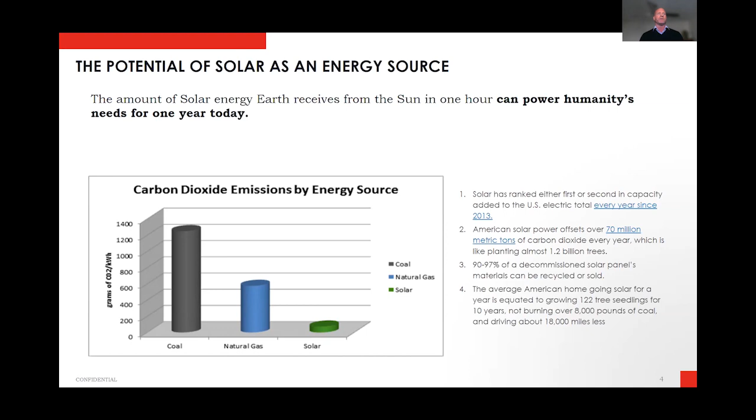You see natural gas there in the blue that's coming up, and then solar. But the idea with solar is it has ranked either first or second in capacity added to the U.S. electrical grid every year since 2013. So again, kind of late to the game, as Diana was saying, the last 10 years. But you can see we're really coming up and trying to make some headway against the cost stack of carbon dioxide emissions.

Let's talk through the next slide here, which I think we'll see the countries with the highest PV penetration. I think there's where Australia comes in. You've got Spain. We saw that come up in the answers. Greece, Honduras, Netherlands, Chile. There's Germany. When I was answering that question myself, I thought Germany was up there. But good to see them.

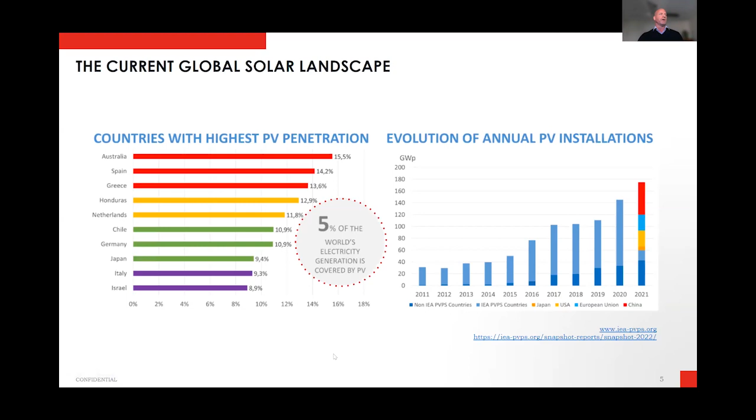Japan, Italy, and Israel. I think the evolution of annual PV installations is pretty apparent here from 2011 all the way to 2021, and you can kind of see that slide. And look at the European Union, and the US is still kind of relatively small in comparison to the global solar landscape, but again, growing.

I think the labor cost has been flat over the past 5 years. Now we've got some PV power increases and some efficiencies in installations and things kind of creeping up, but again, we've got some increased labor rates over the last few years, so that kind of is a wash.

But I think the biggest challenge for solar in the US and the adoption is the customer acquisition cost. That's always been kind of a struggle, and Diana and I being in the residential solar space for a couple of the larger providers in the US, that cost stack can be about 25 to 40% to find the customer through those lead generation activities. And if that pushes down on the margin, it's a challenge for most of these solar companies out there to make money.

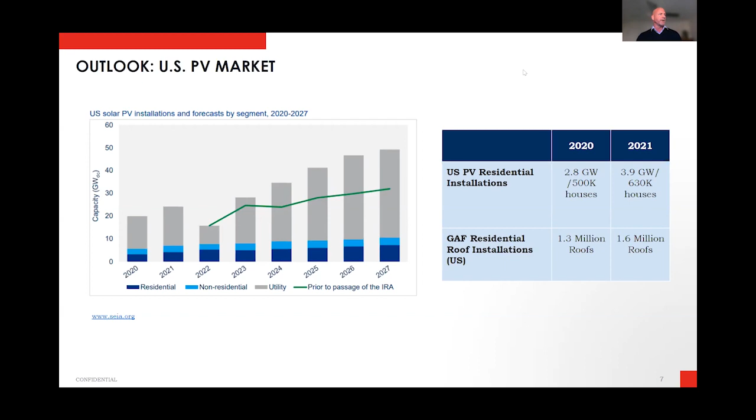What's really pushing our change is the consumer demand. More and more property owners want solar. You guys can probably appreciate that. Talking to the roofing populations, in some parts of the country, 1 in 5 customers is asking about solar at a re-roof. Hey, what about solar? Do you have a partnership? There's no clear-cut answer, but this generation of home buyers is looking for the smart home. They're looking for advancements in technology to include energy efficiencies, and that's obviously why we're all on this call.

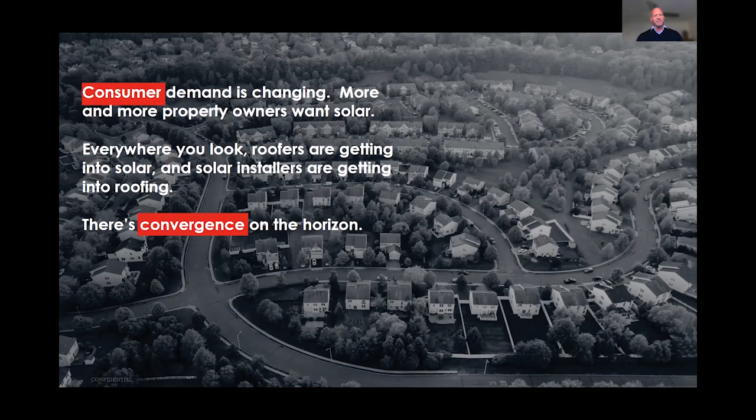But photovoltaics and solar really is out in front in terms of a value add, in a lot of the areas that we really before have never thought of as solar areas. This is definitely a national convergence on the horizon: solar installers are getting into roofing, roofing is getting into solar, and so you see this convergence happening.

Let's talk a little bit about where we've been. I think this is an important kind of background and level set here. Again, coming from traditional bolt-on solar, with these next few slides I in no way am trying to take away from traditional solar progress with rack mount. We came from rack mount. I still think there's a value add there, but I do think there's a fundamental design flaw in the attachment of the racking, the mounting of solar.

And I think that's what drove me to look for the additional product scope that this provides as kind of a built-in, where we're not penetrating 160 holes into a roof, voiding all the warranties of the roof, and having waterproofing issues for years to come.

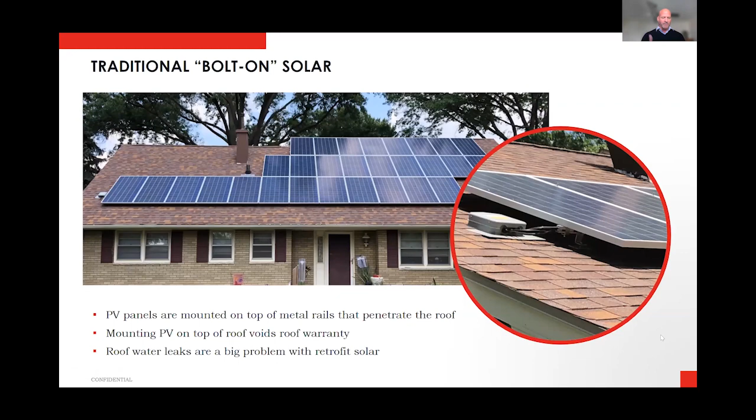And I think I've seen dozens of photos over my 12 years in the business where we've penetrated these 160 holes, hopefully the pilot hole goes in, and then we miss the rafters. Water finds the hole. It always does, drips onto the sheetrock. And I've seen numerous times where the sheetrock in the living room has failed and the whole thing has come undone because of one errant pilot hole.

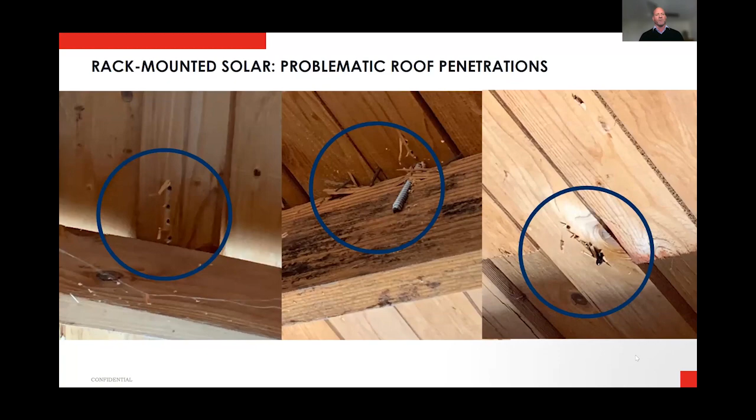And in the industry of rack mount, a lot of the manufacturers and solar installers, I've seen anywhere from as low as a 5-year penetration roof warranty to a 10-year. That's about standard. So what happens to the consumer from years 10 to 20 or 25 of the economic life of that solar? They're really exposed; they've voided the warranty on their entire roof.

So with a solar manufacturer, we're at the mercy of them covering that hole. Number 2 is, will they be in business? Because they are fairly new. And number 3 is, who's taking care of that if the solar company is out of business? And so I think that's inherently the rack-mounted issue that we keep talking about.

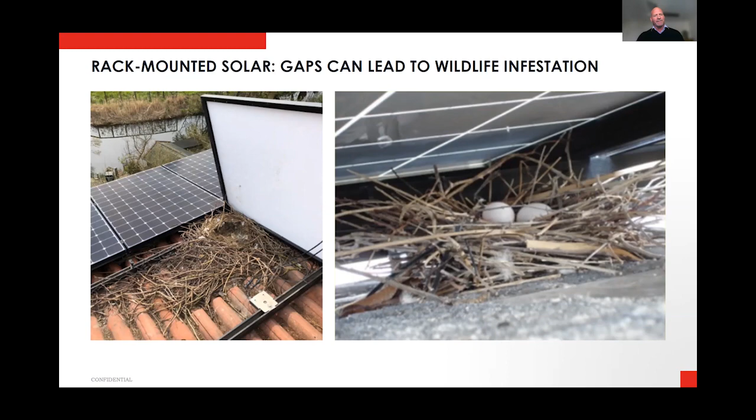Again, you have the infestation that's common in some parts of the country, which really does not do well for breaking down the materials. And then, most notably, wiring under the panels. You've got this exposed wiring, if you will. It just creates hazards. I've seen chewed wires and all kinds of historical issues with that. So again, not taking away from rack-mounted solar, but there's got to be a better way. And I think that's what Diana's going to go through in just a second in our new products. So Diana?

Scott, have you ever heard that PV can actually protect the roof as well, because it keeps the sun and the rain, the things that degrade the roof, off of it? Is there any benefit there? Have you heard of that at all?

Absolutely. If you think about the clearance, some of the clearance can be a bad thing and a good thing. The clearance that is a bad thing, we just discussed. The clearance that's a good thing is it creates an airflow in there, which naturally creates this shading mechanism for the existing shingle or tile and the underlayment. So there's benefit as well for the rack mount, where it will extend the life under the PV.

The problem is then you're looking at the elements that are exposed. So once the degradation of your roof happens, you're replacing the entire roof plane and not just the area underneath. So if the whole entire plane was covered, I think you would have an argument that that may extend the life of a traditional warranty or a shingled roof.

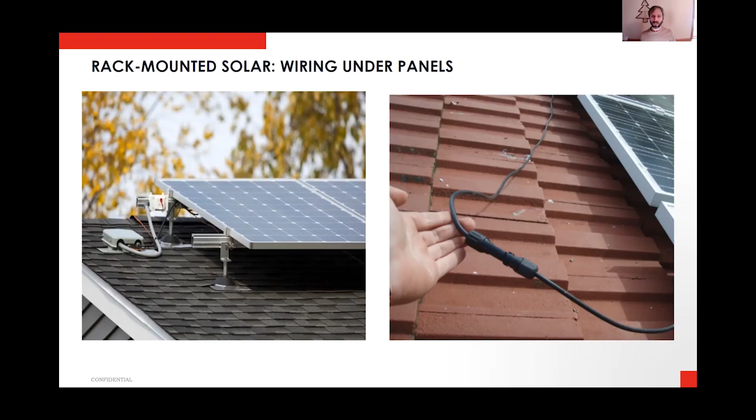And I'm just grabbing some of these other comments as we go. The air gap between. We'll get to those at the end if that's all right. Okay, great. Yeah, sure. Go ahead, move forward. Thanks. Cool. All right. Let's move forward then.

Let's talk about BIPV. BIPV stands for Building Integrated Photovoltaic Products. There are a wide variety of BIPV products that exist. Most of us are familiar with roofing products, but BIPV can also include things like siding or cladding on the sides of buildings, windows, skylights, anything that has a PV component that is built into a part of the structure that already is existing and serving a different purpose. And so it's that integrated roof and solar or window and solar system that is what BIPV is.

So let's go ahead and take a look at some examples of BIPV rooftop solar installations. There have been a lot of attempts at BIPV in the past and currently. Some of them look a lot nicer than others. Some of them are a lot more expensive than others. And there really is a variety here of what is possible, what you can do in this space.

I would say that the earlier renditions of rooftop solar really look mostly like a solar panel that's then just attached to the roof. And then we have the very high-end systems, that really is one fully integrated roof that typically has a lot of complexity and a lot of cost associated with that. And so trying to find a middle ground of how to actually bring a product to market that makes sense for everyone, that serves as a roof, also serves as a solar system, and you can actually obtain it and install it at a decent price is the challenge.

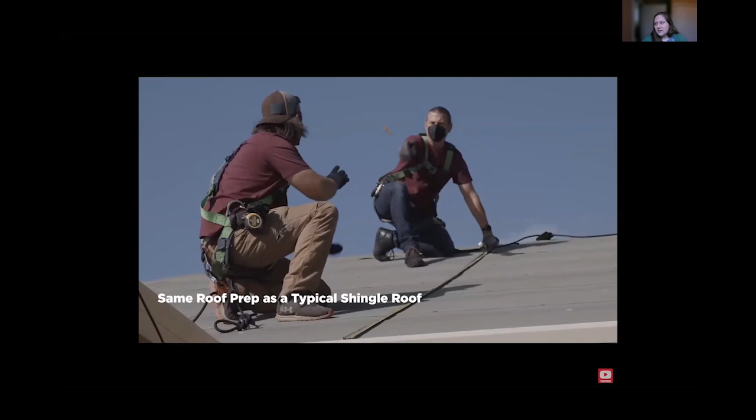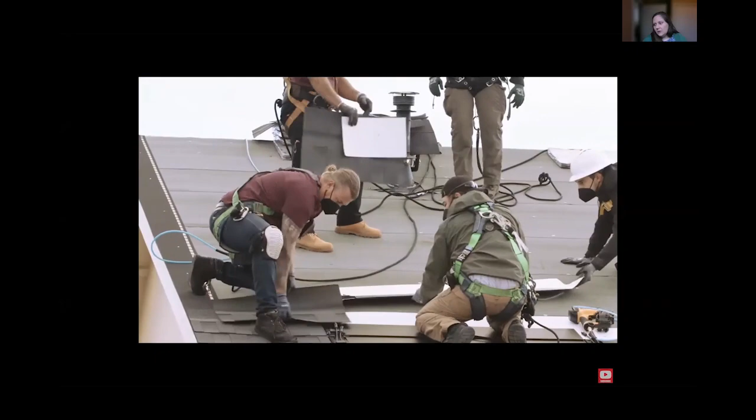This is the installation of a solar roof. There is some music here, but it's literally just music, so we've muted it. So here we are getting the roof ready. And again, the idea here is that this is a product that is installable by roofers. So we're booking in the asphalt shingles. Here is our solar shingle. You can see the nailing strip marked on that TPO strip. And you just go across and up, nail it in.

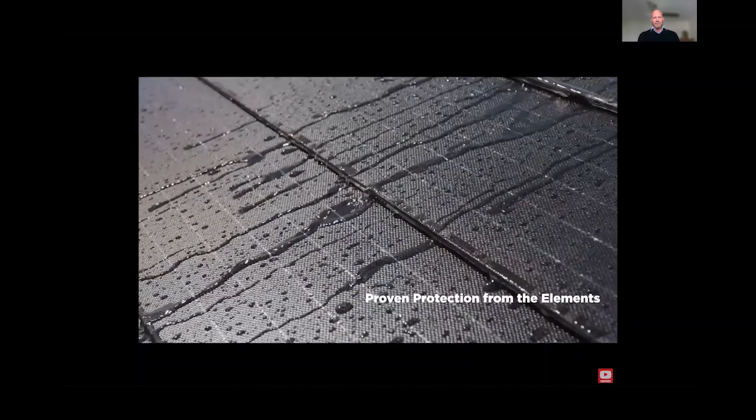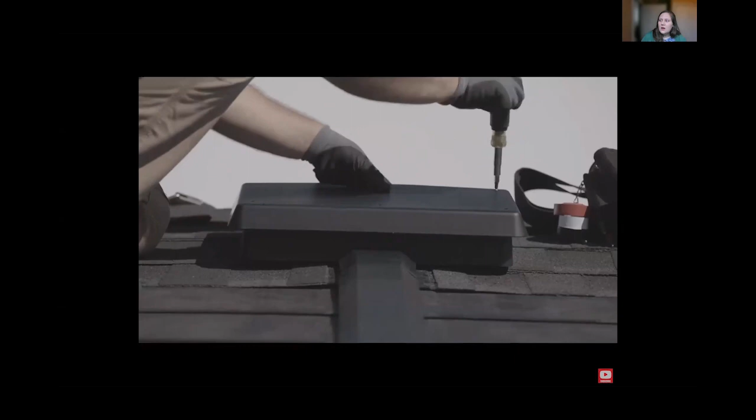I think important to note is they're walking on it. It's definitely walkable and durable. Yep. So the wiring, I did want to call this out specifically. On other BIPV systems, the wiring is often buried underneath the panels.

And this is just some of our employees having fun with the camera here.

So with the wiring, I'm going to pause it so we can take a look. With many other BIPV and also traditional solar installations, the wiring is underneath the panels. That of course does protect the wiring, but makes it really hard if you have any problems with the system in the future. And so especially with a traditional rack mounted system, if you have a problem with a panel that's in the middle of your array, you have to pull up every single panel, potentially in that row or that column or both, depending on how the wiring is done, in order to get to that panel that is causing you a problem, to be able to replace it.

With our system, the wiring is accessible, right? It's just on the left side of each shingle there. You can just pop off those covers and troubleshoot, figure out whatever is going on with any individual shingle as needed. And if there is a problem, you can actually just remove one shingle at a time and replace it, just like you would fix a problem with asphalt shingles existing in your roof.

Diana, sorry if you already mentioned this, but it is direct to deck. So it is sitting directly onto the deck on top of the felt or the roof deck. Yeah, exactly. That's correct. So the stack up is roof deck, any underlayment, and then the shingles right on top. Yeah, great. All right. We already watched that.

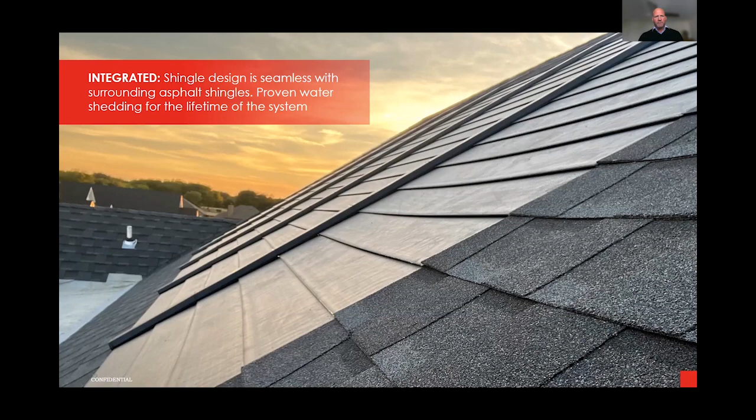I think one great aspect of this is, with traditional rack mounting solar, you have a roofer that has a warranty, an installer that has a penetration warranty, a solar warranty, an inverter manufacturer's warranty, all kinds of different trades in the business that the homeowner or business owner would have to cover.

So we like this one throat to choke, if you will. We have this 50-year leak coverage, 25-year solar coverage on the output as well. It's an all-in-one coverage for leaks, power, energy, and production. And having the existence of 100 years in business, it's peace of mind for everybody when it comes to making sure that home is protected. That's what we do best.

And it's great, it's assembled here in America. We have a factory in San Jose, California producing about 50 megawatts annually in terms of production capacity. We've broken ground and are about ready to launch our Georgetown, Texas facility in Longhorn Junction, which will be about 5x the capacity of San Jose. San Jose will keep that design, and Georgetown will be 250 megawatts annually.

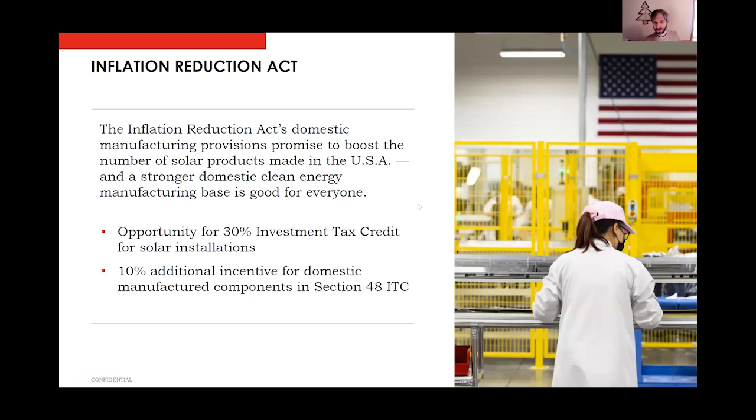Yeah, couple is an understatement, but we'll stick to these things. Exactly. And I think this is important just to levelize and provide a little context. It's very quick math, but your average solar project costs here—I think I did see a question in the chat about cost, and that's a big component here. So if you think about a solar production cost of $16,800 for a traditional solar, you get that federal investment tax credit of 30%.

The roof cost of $15,000, total net investment of $26,760. If you look at the next slide, it breaks it down in a simplistic formula. The cost of a solar roof, if you were going to replace the roof or put a new roof on, would be equivalent to adding a retrofit to a brand new roof. You would not take a 5-year-old roof off and put this on in replacement of that. You would do this at the point of construction or remodel, or when the roof needed to be replaced, and those costs align.

Compared to a rack-mounted solution, this price point would fall right in line with a new roof and adding solar as a rack-mounted solution. So we are equivalent in cost in that cost stack.

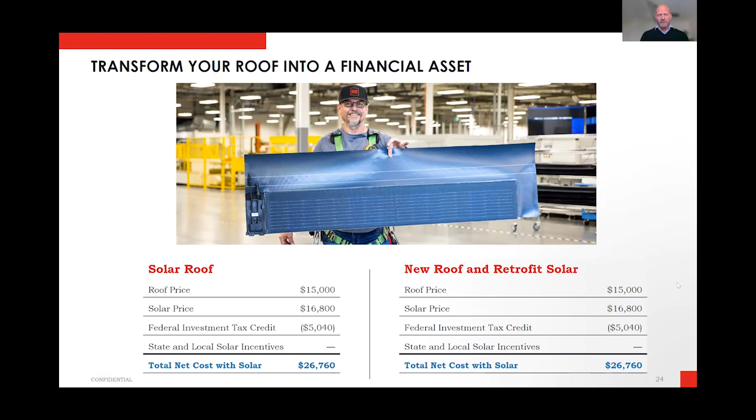I think the biggest thing to call out here is the roofer handles the entire roof and solar installation. You get about a 50% labor time reduction between a separate roof and a rack mount. It's installed by a roofer, so you're not calling in another sub. It removes that traditional solar trade and complexities from the job site. Full individual and tract design services are available, and cash and financing options are available. There's no roof penetrations, and our system is completely waterproof. Those are the highlights of this product - it's a turnkey solar solution without punching a bunch of holes in the roof.

Where do roofers get special training, special certification? How does that work? If you're bringing it up, I'm happy to pause.

We didn't have that included in the presentation, but I can talk about it a little bit.

GAF is a roofing business, and GAF Energy partners with those existing roofing contractors. They do have a certification process. The highest level certification is called Master Elite. GAF Energy works with those Master Elites to train them to install Timberline Solar. The idea is not that it's this big complicated product that needs all of the specialized training - it really is just a couple basics. The shingle goes on just like asphalt shingle, but teaching them how to do that portion, how to do the wiring - the roofer's scope ends at the top of that wiring column.

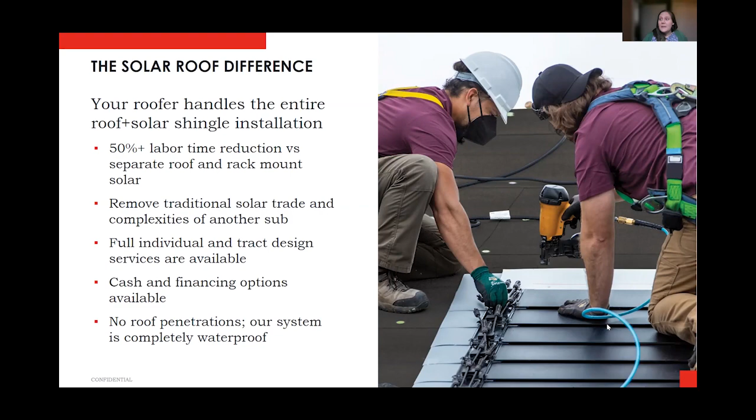I assume on the electrician side, it's your standard solar install at that point, right? Exactly, yeah. So I'll talk about that a little bit next. We use traditional residential string inverters - after you get to the inverter, it is exactly the same as any other type of residential solar system. That being said, I think we can jump right into this.

A little bit of the technical details on the shingle itself. The solar portion of the shingle is 5 feet long, and that reveal, as Scott mentioned earlier, is 7 9/16 - that is the width of that larger shingle. I did see one of the questions - is that shingle installed on the entire roof? The answer is yes. It has a larger reveal to match the width of the solar cell itself.

It actually goes on faster than traditional asphalt shingle because you get more coverage per course, and roofers actually love that. It's one of the innovations in the roofing industry that is a little bit separate from the solar portion - it's just a new and different thing in the roofing industry that roofers really love as well.

As the snow is falling across the country, and probably where a lot of these folks on the phone are, let's talk about the weight a little bit, because I think that's an important distinction.

The weight of the assembly is 10 pounds for this entire shingle piece, which translates to a little bit more than 3 pounds per square foot, approximately similar to asphalt shingle. So there's no added weight here. This is actually slightly less than traditional asphalt shingle. You get the same exact weight on the roof as if you only had asphalt shingle, so you don't need to account for additional weight like you do with traditional rack-mounted systems.

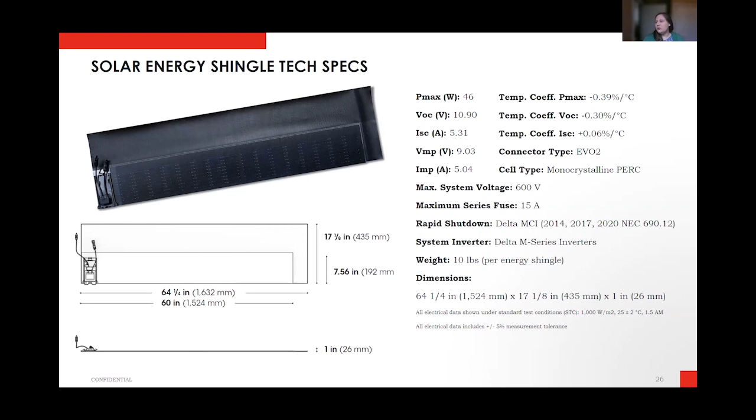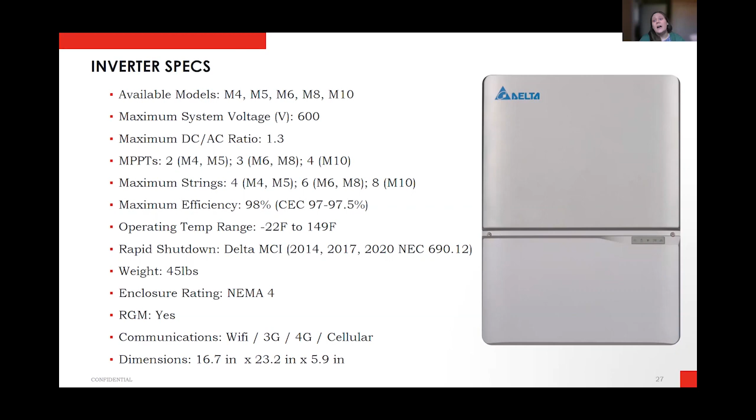So we talked a little bit about the monocrystalline cell type. I did want to talk next about the inverter. We pair with Delta M series inverters at this time - this is just a traditional residential inverter, with different sizes available. Our design team figures out both the combination of how many shingles fit on your roof, and also the electrical characteristics to make it string together into one system.

That being said, this whole system together is certified as a UL 7103 BIPV system - it was the first product to actually achieve that certification. It is the entire kit, as Scott mentioned earlier: the energy shingle, the asphalt shingle, currently the Delta inverter, and then the Delta rapid shutdown as well. So the rapid shutdown solution is for fire safety.

So that when you lose power to the system, the entire array shuts down so that you can safely navigate around it in case of emergency.

I do see some questions about SolarEdge and microinverters and stuff in the chat. So at this time, we are only certified with the Delta inverter, although that won't necessarily always be the case. About the certification generally, I did want to just harp on this a little bit more.

So the UL 7103 certification is a comprehensive certification that goes through all of the roofing aspects as well as all of the solar aspects in order to make sure that this is one complete system. And so it's testing the roof for fire rating, for wind-driven rain, wind resistance, and then also testing the solar components for that rapid shutdown compliance, and all of the rest of the solar components as well. So it's actually a very difficult certification, and we are proud that we do have that in our pocket.

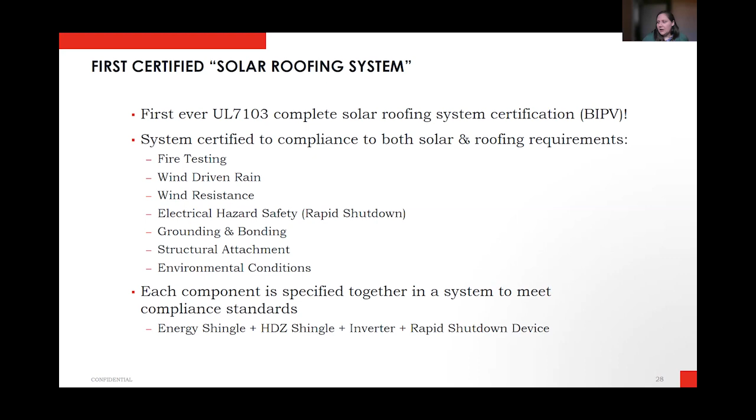Did you talk about the wind speed rating on it? I don't know if that was somewhere on there. Oh, yeah, there it is. Thank you. Yeah, so just a little bit more detail on that larger reveal shingle that we have. So the system is rated 130 miles per hour for wind.

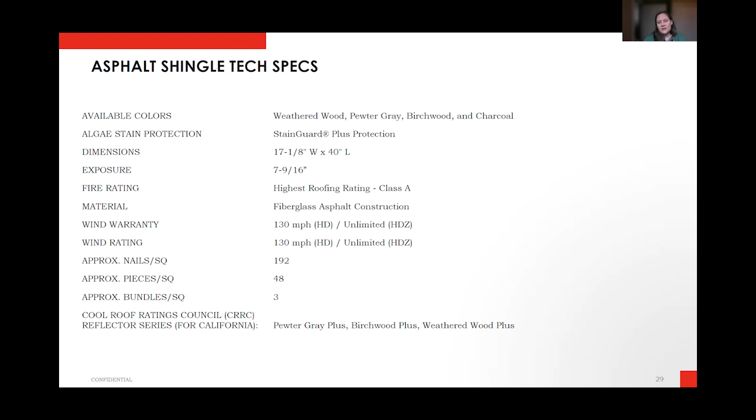We are still waiting on certification from Miami-Dade County, which for those of you who know, Miami-Dade is the most difficult certification in terms of wind, because of course the hurricanes that come through there. But that is the only certification that we're still waiting on when it comes to wind related classifications. We do have Florida product approval. And so we are very confident in the ability for this to stay on the roof, just like you would expect a good asphalt shingle to stay on the roof as well.

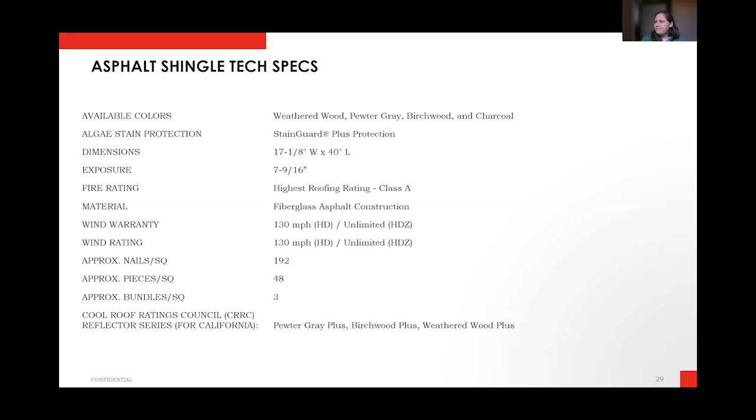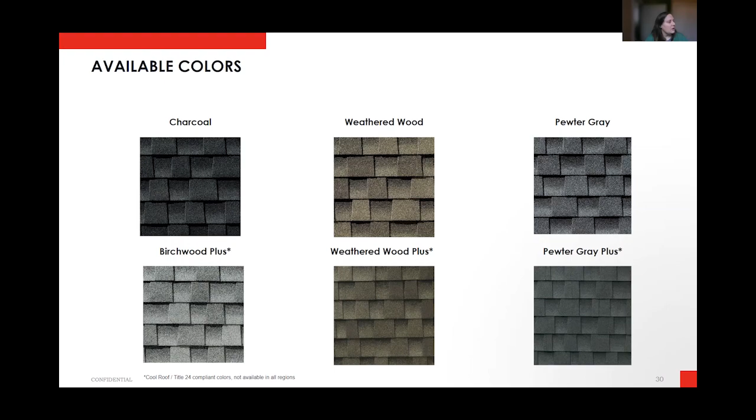Great. All right. We do have more pictures and such if people are interested, but that's the end of the content that we've prepared. Brett, I'll turn it back to you if you want to take us through Q&A. Yeah, great. We do have a lot of questions here. I don't think we're going to get to all of them today, but a lot of fantastic questions. And I've got a couple things to show here for those who aren't going to be able to stay through all the questions, but we're going to try to answer as many as we can and hang out.

So, going back to the roofer, I'm kind of putting myself in the shoes of a roofer who's watching this, or most likely an architecture firm or contracting firm who manages their roofers, or a homeowner who knows a great roofer and wants to hire them. So they're saying right now to themselves, how do I get my roofer certified? What does that look like? Is there a cost to them? Are there any special programs that maybe cover their time away from the field for going through the training? Have you ever seen anything like that? What does that look like from a cost, timing and effort standpoint for these roofers to get this training?

So do you want me to take that? I'll take that. Sure. So right now, this product was introduced in January of 2022, and we made a very conscious effort to not expand further than we were able to provide product. And so as a result, this is not available to just anyone at this time. This is available through our roofing partnerships. So if you are interested in this roof, we would direct you to one of our existing certified roofers.